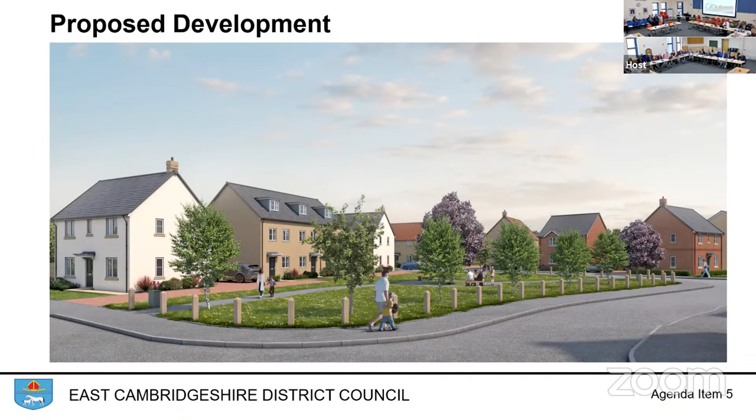The main considerations remain the same as they were for the previous consideration of the applications. I won't list them all, but they're there on the screen for members.

In terms of the August committee deferral of the phase 1 application, members expressed concern and deferred the application to give the applicant the opportunity to address the issues you can see there: overdevelopment, lack of sufficient 1 and 2 bedroom houses, lack of sufficient green space, and visitor parking raised during the debate. So unallocated parking wasn't actually detailed in the resolution committee voted on, but I will show you how that has also been addressed by the amended scheme.

To summarise the main revisions: 5 dwellings have been removed from this phase, and similarly on phase 2A 5 dwellings have been removed. That was an attempt to address concerns about the layout of the phases themselves and the balance of development across the wider site, with phase 3 to come at a later date.

This phase now proposes 138 total dwellings out of the 350 permitted in the outline scheme. There's been a substantial reduction in larger 4+ bedroom market houses from 51 to 34, an increase in 2 bedroom market houses from 2 to 15, an increase in the size of the central open space in phase 1, and also an increase in visitor parking spaces.

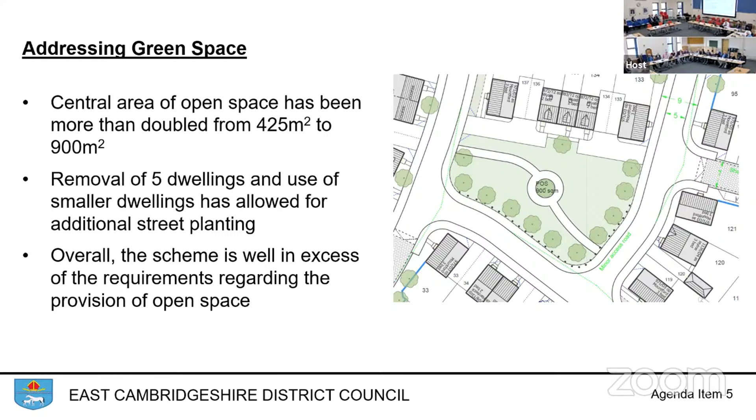Turning to car parking - as I said in my introduction, this wasn't a reason for deferral given for phase 1, but it was raised in debate by members, a concern about under-provision of unallocated visitor parking. That has been increased by 8 spaces, up to 26 total. The policy requires up to 1 space per 4 homes, and it's gone from 1 in 8 homes in the previous submission to 1 in 5 here, getting very close to that maximum suggested level of visitor parking.

Members should also be aware that the allocated parking - on-plot parking for dwellings - exceeds quite substantially the 2 spaces per dwelling requirement. The total car parking provision is 353 spaces for the 138 homes now proposed.

So turning to the final planning balance and our recommendation. Officers previously noted weaknesses in the scheme. In our recommendation at the August committee on the previous scheme, we felt it was acceptable, but it wasn't a full-throated recommendation of approval, and committee deferred the application given its concerns. The developers engaged with us to address your concerns, and we are now of the view that we can give our full support to the scheme as revised and currently proposed.

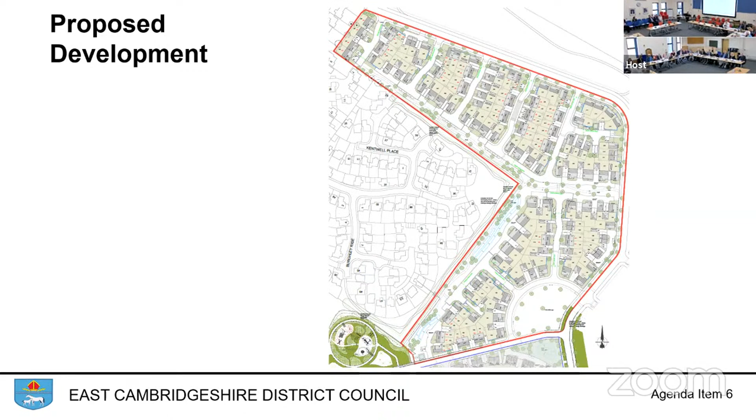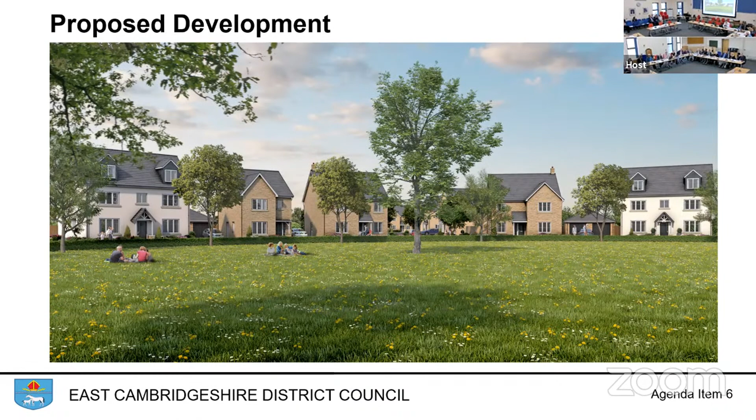Agenda item 6 is the phase 2A application, deferred at August committee for reasons I'll come on to, and amended now to 133 dwellings across this phase. That is the parcel you can see there in red, and on an overhead relative to the Felsham Chase neighbourhood to the west. The new proposed layout, which I'll point out some key changes shortly, and an updated render of the crescent of houses around the central public open space area. Again, the main considerations today are as they were in August.

As I said, this was deferred at August committee to give the applicant opportunity to address members' concerns. The identified issues were overdevelopment, poor housing mix, poor quality layouts, lack of sufficient green space and landscaping, and parking provision, which was actually part of the resolution in respect to phase 2A as one of members' concerns.

So the applicant has provided a revised scheme for phase 2A, an attempt to address members' concerns. 5 dwellings have been removed from this phase, so it's now 133, a total of 350 across the wider site. A reduction in the larger 4+ bedroom market houses from 49 to 28, with an increase in 2 and 3 bedroom market houses, as you can see there.

The applicant has replanned 2 of the denser areas on the site, which were the Mews courts as they previously were, adjacent to the Spine Road, which I'll come on to. They've also increased the widths of verges and corners, entrances into streets to allow more tree planting, more greening of the site, and an increase in visitor parking spaces.

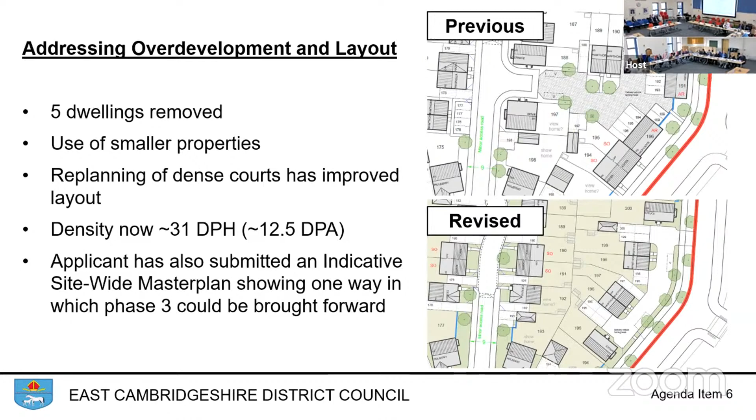I won't go into too much detail again on the indicative master plan. I've discussed that in respect of phase 1, but again, we are content that this has addressed our concerns around the balance of development on the site and how later phases might be delivered in a way which presents a high quality, holistic development of the wider site.

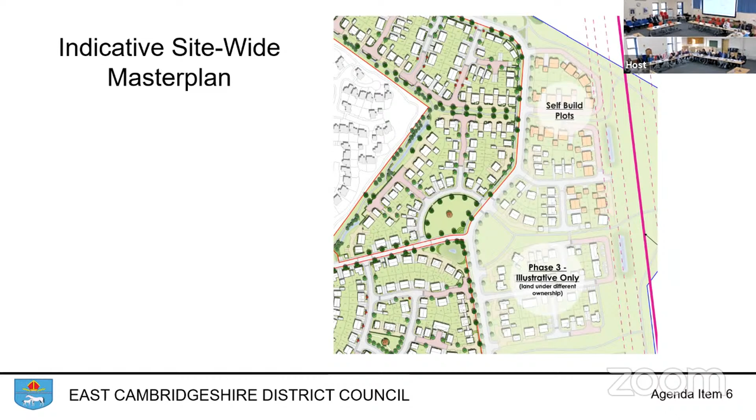In respect of concerns about landscaping, more street trees have been added. That move towards smaller dwellings, slightly fewer dwellings, has allowed for houses to be set further back from the street. For example, previously quite hard up against the secondary Spine Road, whereas now pushed back to allow some more tree planting. So you'll now have a kind of double avenue almost of trees down the secondary road, which I think is a big improvement.

And generally across the parcel, as I said, corners have been widened. There's additional tree planting. And as I pointed out with the previous excerpts of the plans, there is a more informal street structure in certain areas as well.

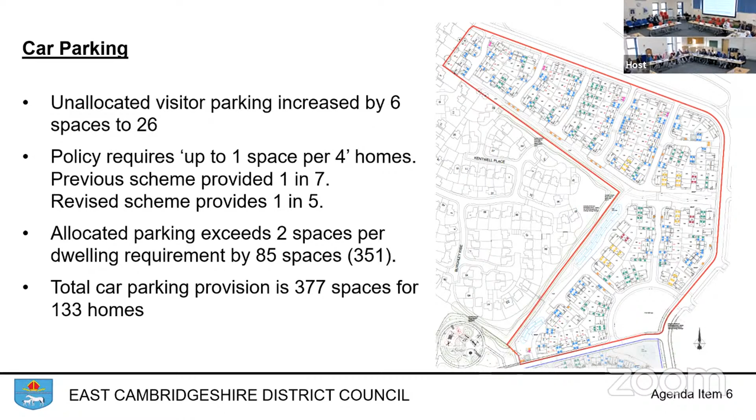So yeah, planning balance and our recommendation. Again, when we previously recommended this to members, it did come with some caveats. We said there were weaknesses within the scheme. I think members identified those and some others. And the applicant has been very willing to engage with those concerns, and I think has provided a revised scheme which addresses the weaknesses that we'd found and the concerns that members had expressed.

And again, we're now of the view that the revised scheme represents a high standard of design quality, complies with the local plan. So again, on this application, members, we're seeking your approval to give us delegated powers to approve the application once we take care of those drainage conditions. Thank you very much indeed.

I don't believe Elizabeth Bruce has arrived. No, she's not. So Rebecca Smith, would you like to just come and make any additions you feel have been missed out? You've got 5 minutes to tell us about it.

No, I think Dan's very clearly set out again how we've taken on board the comments, the concerns raised by committee members in regard to phase 2A. Again, there's significant amendments to the market housing mix, the introduction of more green infrastructure, landscaping on site, more visitor parking. And again, hope we can agree that it's a high quality design. So really, if there's any specific questions on phase 2A, I'm happy to take them.

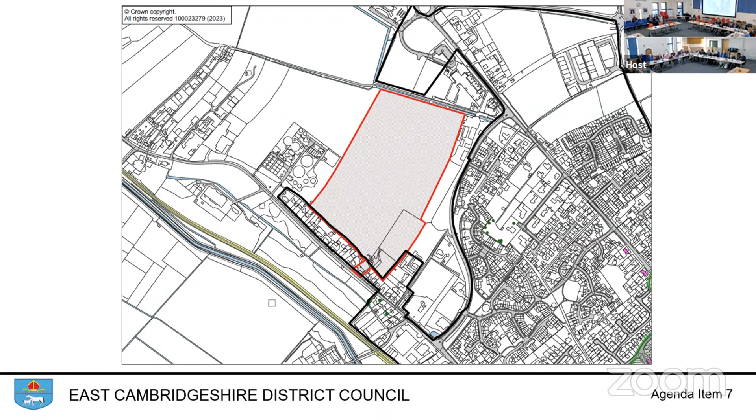The map displayed above shows the outline of the site in red. You can see the development envelope of Soham in black, and the image above shows an aerial overview of the site.

The application seeks approval for the reserved matters for 166 dwellings and identification of 9 self-build plots, totaling 175 dwellings. The proposal also includes open space and associated infrastructure.

Outline consent was granted at this site under an appeal decision, which was held as a public inquiry in January 2022, and the outline consent secured the detail of access.

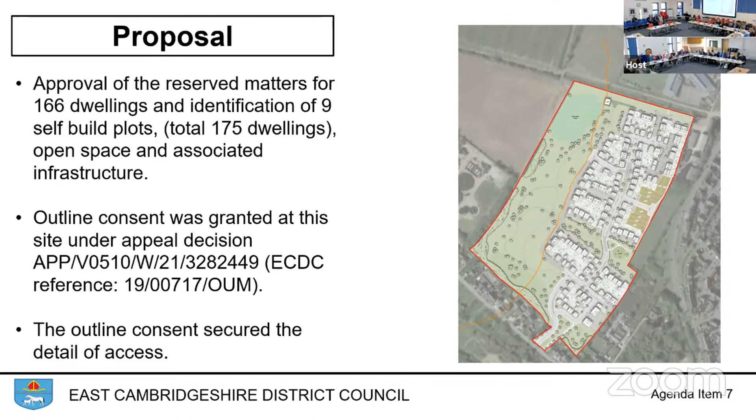The main considerations in relation to this application are the principle of development, affordable housing and self-build, residential amenity, visual amenity, highways matters, flood risk and drainage, ecology and climate change.

With regard to the principle of development, while the application site is situated outside of the defined development envelope, the principle of development has already been established through the 2019 planning permission, which was allowed at appeal. The reserved matters application has been made within the timescales conditioned, and therefore the principle of development is considered acceptable.

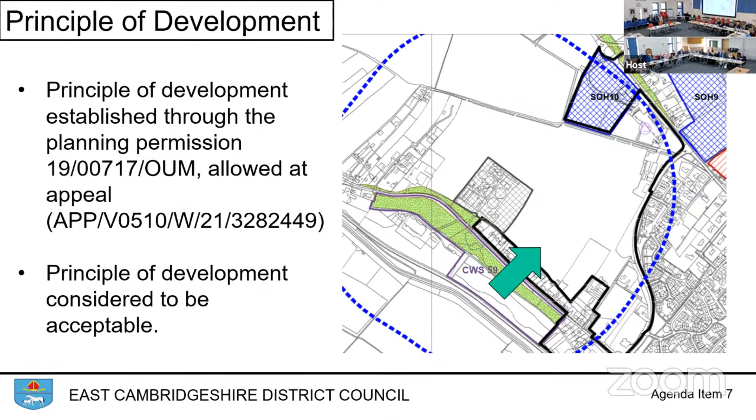Moving on to affordable housing, self-build and housing mix, the application proposes 30% affordable housing and 5% self-build properties, which have been secured via Section 106 legal agreement on the outline.

The Council's housing strategy and enabling officer has reviewed the proposals and confirms support for the application, as it will deliver 30% affordable housing on site and meet a tenure of 77% rented and 23% intermediate housing in accordance with the approved Section 106.

The applicant has confirmed that 5.6 hectares of open space is provided as part of the scheme, and the proposal also includes a locally equipped area of play with 6 pieces of play equipment.

In terms of residential amenity, the outline application acknowledged that existing occupiers in the area are likely to experience an increase in noise and disturbance from the development, including traffic movements. However, this was not considered significant enough to justify refusal on that basis. The proposed site layout has been laid out to provide significant separation between existing properties and proposed dwellings.

Areas of open space are located to the rear of the properties fronting Broad Piece. The proposal is therefore not considered to create any overbearing, overlooking or overshadowing impacts to neighbouring properties.

The appeal decision conditioned matters such as construction times and construction method statements in the interests of amenity, so that has already been dealt with on the outline application.

There are no objections from Environmental Health or the Environment Agency relating to odour from the Soham Water Recycling Centre. They advise that the applicant has taken into consideration the odour buffer zone and has ensured that the amenity of future residents has been considered adequately.

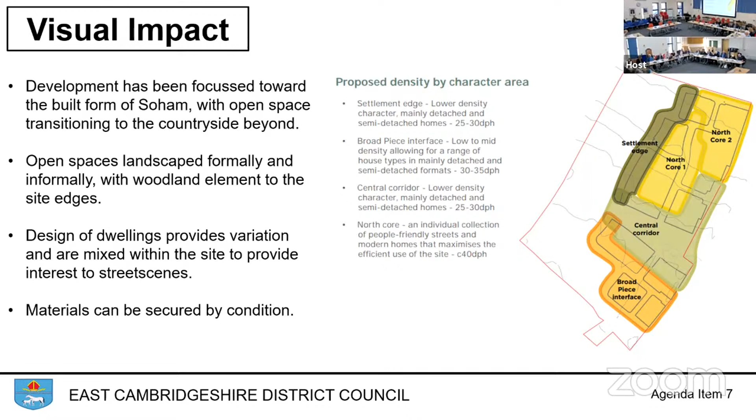In terms of highway safety, the site access and road widening works have already been secured under the appeal decision. Within the site, dwellings generally have 2 car parking spaces each. Some plots benefit from garages in addition to 2 external car parking spaces, and where 1-bedroom properties are proposed, these have 1 associated parking space.

Aside from plots 5 to 9 and 10 to 14, all dwellings are to be provided with electric vehicle charging points, and the parking layouts across the site are a mixture of side-by-side and tandem spaces to reduce vehicle-dominated frontages. 42 visitor spaces are proposed in line with policy COM 8 of the local plan, and the Local Highways Authority has reviewed the application and raises no objections.

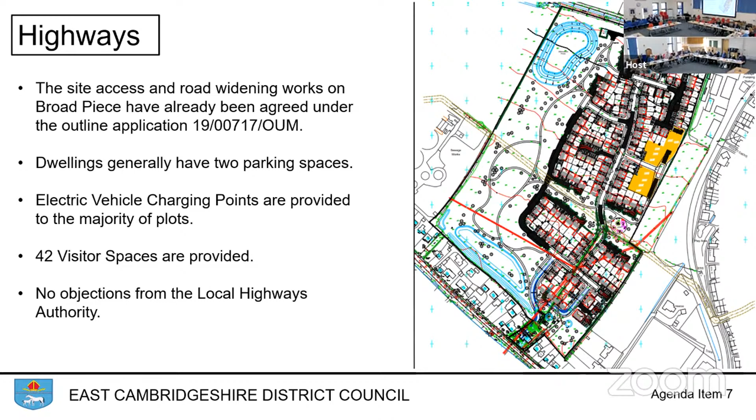In terms of ecology, the applicant has submitted a landscape and ecology management plan. Alongside the application, the report sets out a number of habitat creation proposals and conservation objectives, as well as setting out management for a period of 30 years.

Natural England have raised no objections to the scheme, and the proposal has also been reviewed by the Wildlife Trust, who note that the ecological reports and biodiversity net gain assessment provided for the original application have been updated. They advise that the proposals still accord with East Cambs policies and nationally adopted planning policy for biodiversity, and they raise no objection, and those matters can be secured by condition.

In terms of flood risk and drainage, as part of the appeal decision, it was conditioned that schemes for foul and surface water drainage would be secured by condition. The applicant has submitted information alongside this application, as well as by discharge of condition, as per the appeal decision. The lead local flood authority have advised that they have no objection to the proposal.

Anglian Water have advised that the foul drainage from this development is in the catchment of the Soham Water Recycling Centre, and that it will have available capacity. They advise that the submitted layout plan is acceptable and accords with the Cordon Sanitaire for the Water Recycling Centre, and that the impacts on the public foul sewage network are acceptable.

The Environment Agency have advised that they have no objections to the scheme. The IDB have been consulted and have noted that the details for the bunds and embankments to serve the attenuation ponds require further information regarding construction material, and during discussion over the details required, they've confirmed that those details can be secured by condition. So based on the information provided and lack of objection from statutory consultees, it's considered that flood risk and drainage can be adequately dealt with in accordance with policy ENV 8 of the local plan.

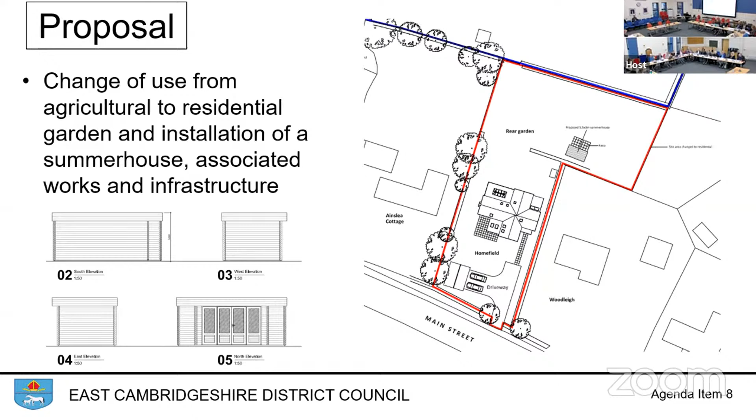The proposal seeks to change the use of agricultural land to garden land and the installation of a summer house. The summer house measures 5.5 metres by 3 metres with an overall height of 2.4 metres. The plans show the area included within the curtilage, within the change of use, and the siting of the garden outbuilding.

The main considerations within this proposal are the principle of development, visual amenity, residential amenity, and ecology. Regarding the principle of development, Policy Growth 2 of the East Cambridgeshire Local Plan 2015 states that outside defined development envelopes, development will be strictly controlled, having regard to the need to protect the countryside and the setting of towns and villages. Development will be restricted to main categories listed within the policy and may be permitted as an exception, providing that there is no significant adverse impact on the character of the countryside and that local plan policies are satisfied.

The proposal seeks to change the use of agricultural land to garden land and the installation of a summer house, which is not an exception listed within Growth 2. As it's not listed as an exception, the proposal is therefore contrary to Growth 2. However, paragraph 47 of the National Planning Policy Framework states that planning law requires all applications for permission to be determined in accordance with the development plan, unless material considerations indicate otherwise. This is a reflection of the requirements of the Planning and Compulsory Purchase Act.

The visual impact of the proposed change of use and siting of the summer house would have minimal impact on the public realm due to its position at the rear of the host dwelling and its landlocked nature. The summer house would not be out of character in terms of materials and design for a domestic garden, and would therefore have no considerable impact upon visual amenity.

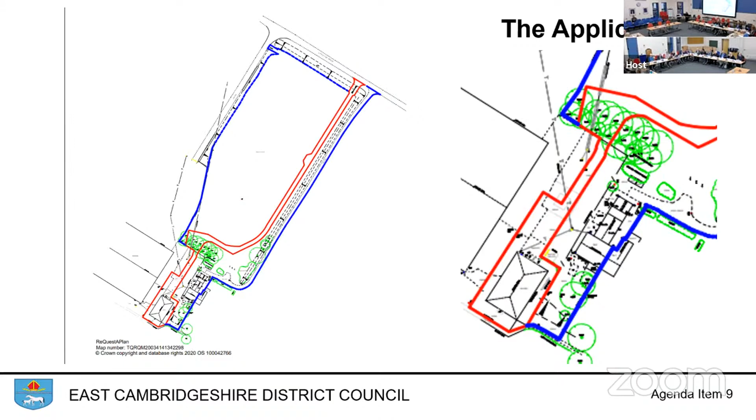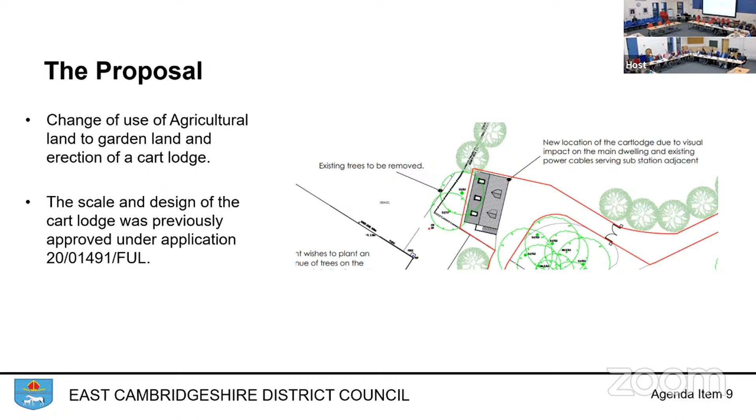The proposal seeks to change the use of the agricultural land to garden land and the relocation of a previously approved cart lodge. The plan shows a close-up of the area included within the change of use and the new siting of the cart lodge. Above is the picture of the approved cart lodge and the plan of where it was previously located under an application in 2020.

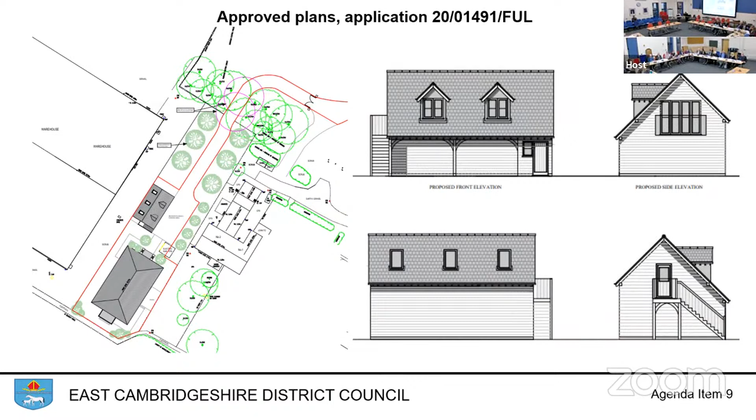The cart lodge, as mentioned earlier, measures 10.7 metres in length by 6.2 metres in width, has an eaves height of 2.2 metres, and an overall ridge height of 6.3 metres. The design of the cart lodge remains unchanged in this proposal. The main considerations of this application are the principle of development, visual amenity, residential amenity, ecology, highways and flood risk.

The principle of development under Policy Growth 2 of the East Cambridgeshire Local Plan 2015 states that outside the defined development envelope, development will be strictly controlled, having regard to the need to protect the countryside and the settings of towns and villages. Development will be restricted to the main categories listed in the policy and may be permitted as an exception, providing there are no significant adverse impacts on the character of the countryside and other local plan policies are satisfied. The proposal seeks to change the use of agricultural land to garden land and reposition the cart lodge, which is not an exception listed within Growth 2. As it's not listed as an exception, the proposal is therefore contrary to Growth 2.

However, paragraph 47 of the National Planning Policy Framework states that planning law requires applications for planning permission to be determined in accordance with the development plan unless material considerations indicate otherwise. This reflects the requirements of the Planning and Compulsory Purchase Act.